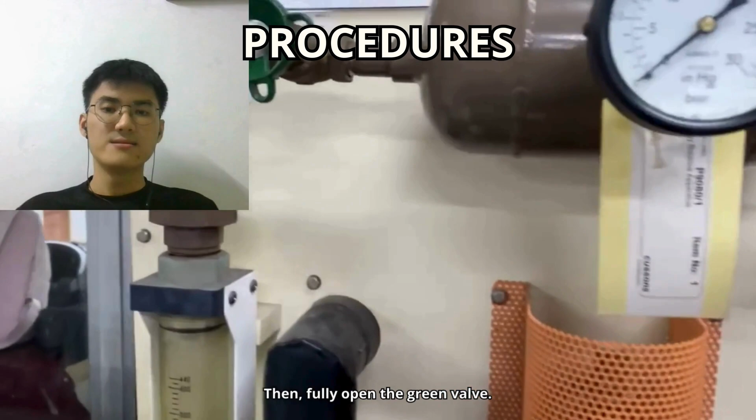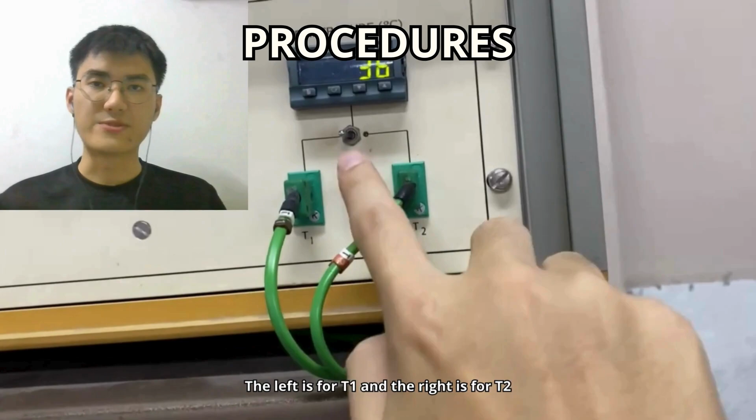Next, we are moving on to the procedures. Turn on the main switch, then fully open the green valve. Record the temperature and pressure, and also record the temperature for T1 and T2. The left is for T1 and the right is for T2. All the readings are recorded in the table below.

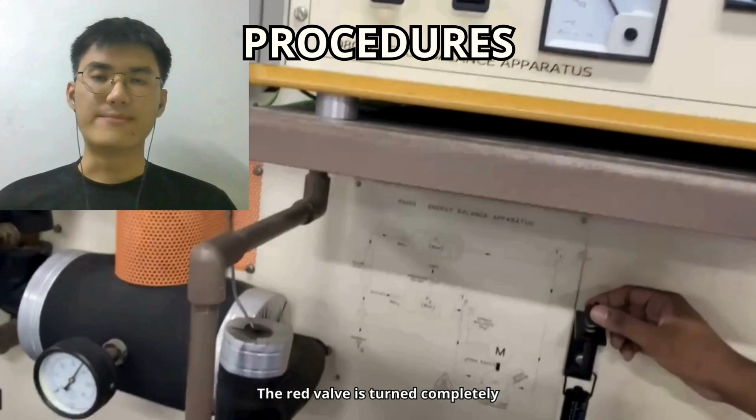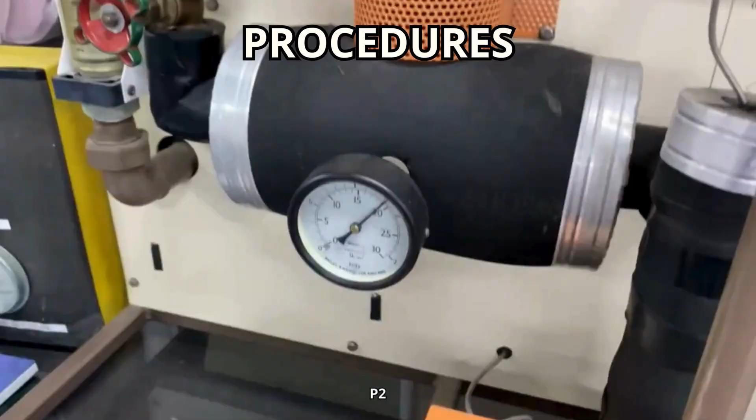When the motor is switched on, the red valve is turned completely and the spring balance is adjusted until the indicator is between the two black lines, both simultaneously. Record P1 and P2, the electrical power, motor spring balance, motor speed,

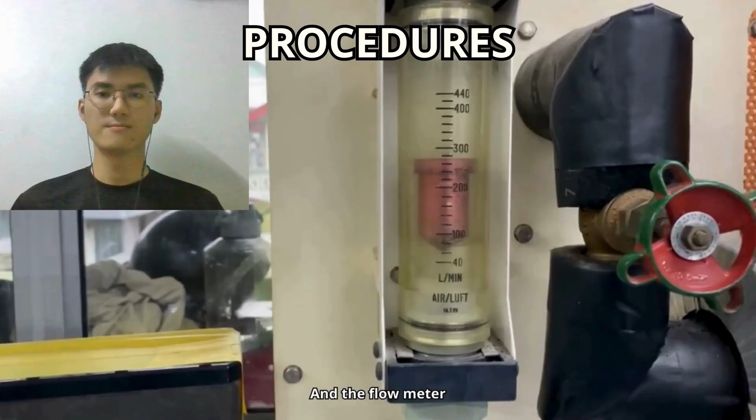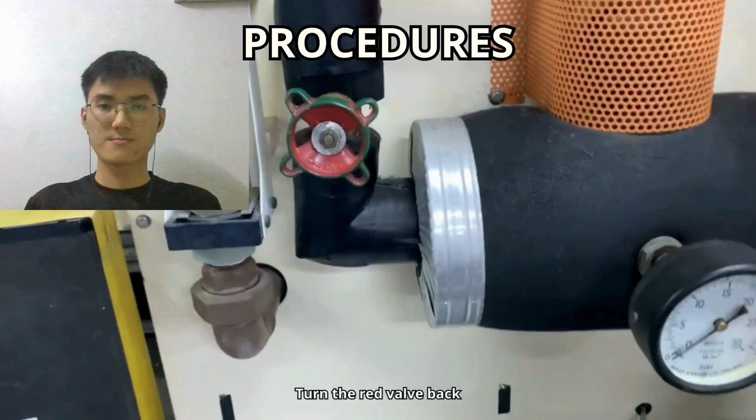and the flow meter. When the motor is switched on, the temperature T2 is recorded immediately and subsequently at every 60 second interval. The reading for the temperature T2 is stopped after the last two temperatures are constant. Now that we have finished with the experiment, it's time to switch off the machine. Turn the red valve back and switch off the motor.

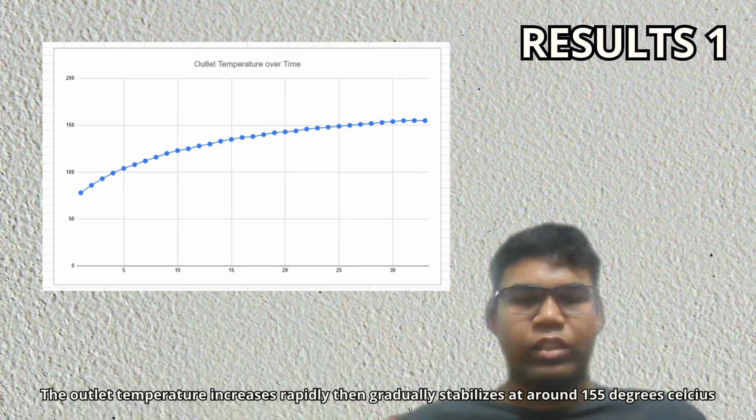In the experiment, we have obtained a lot of data, which was subsequently plotted on a graph. The first graph is the outlet temperature over time. The outlet temperature increases rapidly, then gradually stabilizes at around 155 degrees Celsius. Now we have to calculate and track the energy added to air by the compressor, HC, and the heat emitted from the compressor, QC, against time respectively.

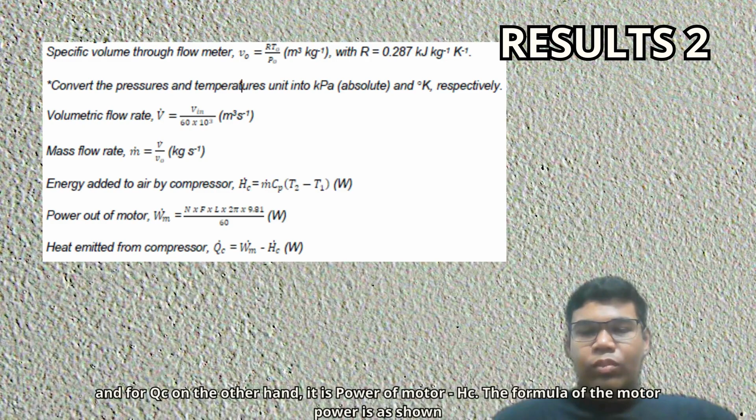So, to determine the amount of energy added to the air as well as the heat emitted by the compressor, these equations are used for the calculation of HC and QC. As you can see here, HC is the product of mass flow rate, specific heat capacity of air, and the temperature differential. Then you can see the formula of the mass flow rate, and the value of input velocity is from the table. And QC, on the other hand, is the power of the motor subtracted by HC. The formula of the motor power is as shown.

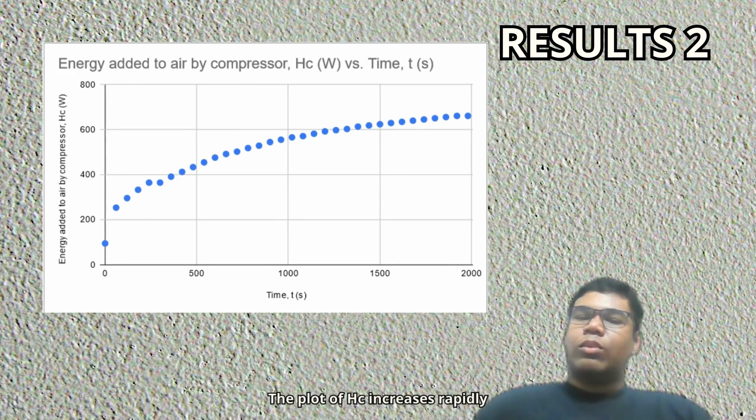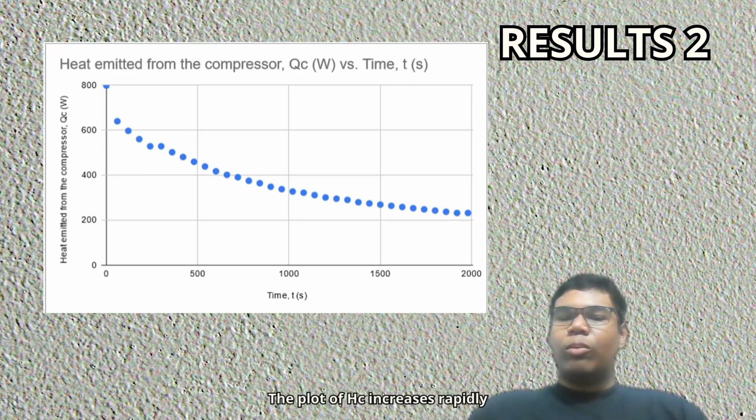Now, we shall see the tabulation of HC and QC with time. Next, these are the graphs of HC and QC with time respectively. The graph of HC increases rapidly until it stabilizes at around 661 W, while QC decreases rapidly until it gradually stabilizes at around 232 W. So, HC increases with time and is the opposite of QC, which decreases with time.

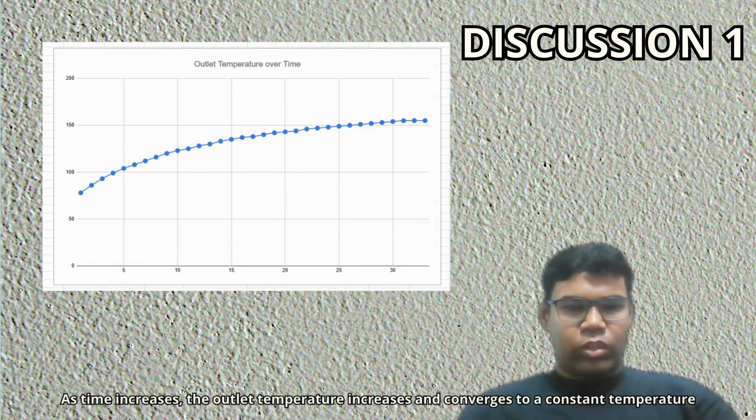The relationship of the outlet temperature over time can be determined: as time increases, the outlet temperature increases and converges to a constant temperature. At this point, the gradient of the graph will reach 0. From the energy curve, we can see that as time increases, more energy is added to the air by the compressor.

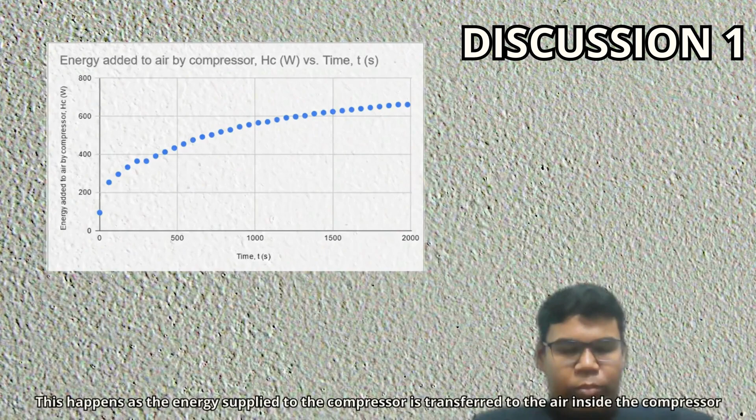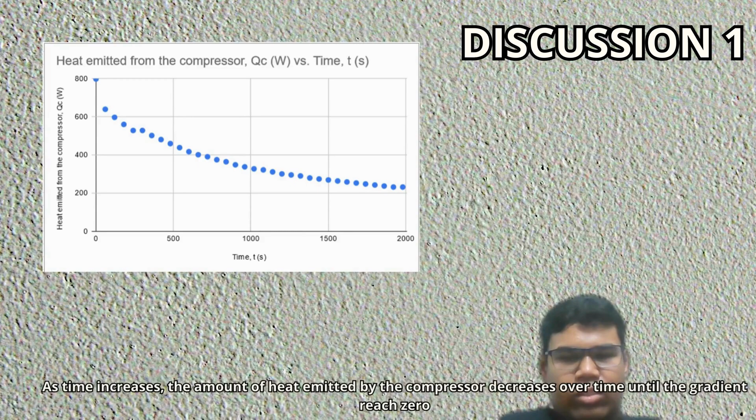This happens as the energy supplied to the compressor is transferred towards the air inside the compressor. Okay, we see the second energy graph. Next graph, you can see the heat emitted by the compressor. As time increases, the amount of heat emitted by the compressor decreases over time until the gradient reaches 0. You can see that initially there is a lot more heat energy being produced by the compressor, and as time goes on, most of it is transferred to the air being compressed inside the compressor.

For the thermodynamics phenomenon that relates to this heating curve, one that comes to mind is the activity of rubbing two surfaces together very rapidly, such as with a pair of hands. When the hands are rubbed together, heat will be generated by the hands. Over time, the hands will get warmer until they reach a certain temperature where they will stay at a constant temperature.

For the discussion, which is to explain all the energy conversion that happened during the compressor operation in this experiment, several energy conversions occur. This conversion highlights the transformation of mechanical work into heat energy. At the beginning, when the power is turned on, the energy is converted to mechanical energy by the motor, which can be detected by the tachometer reading. After that, the mechanical energy is transferred to the compressor.

In the compressor, when the air is compressed, the pressure will increase. The compression of air is adiabatic. Due to the compression, internal energy is increased, which makes the temperature of the air increase. That shows the conversion of mechanical energy to thermal energy, which is heat. Because of the work done, the temperature increased every 1 minute, which clearly shows the changes of the heat.

Throughout the experiment, the principles of the first and second law of thermodynamics are evident, showcasing the conversion of energy from one form to another, the increase in entropy resulting from the energy transformation, particularly in the conversion of mechanical work into thermal work, which is heat.